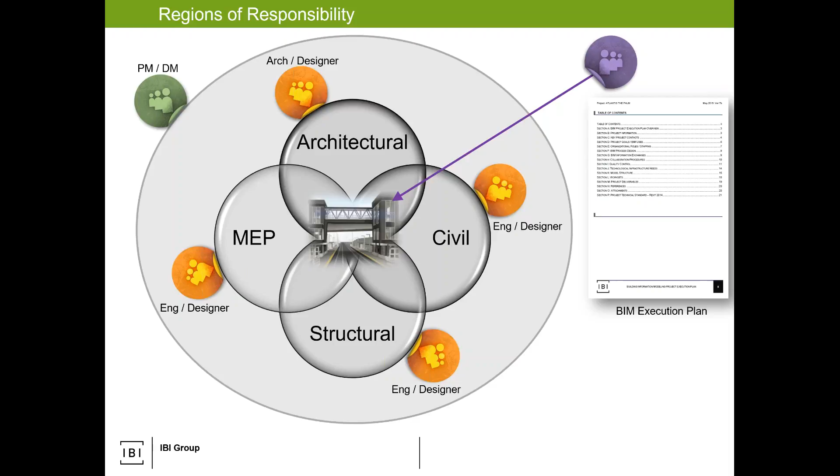But focusing on that central data, there is this role we're talking about today, the BIM lead with their execution plan. For me, the most important role—others on the project may disagree, doesn't matter. There's a vehement importance required here to document and define what we're doing and why we're doing it relative to that thing in the middle that we call the model, which has a direct influence on every other entity, person, or role associated with any one project. So strong, so powerful, so important. Let's just remember that.

The role, in a nutshell, will span these disciplines, so there's elements of BIM within all these disciplines. I like to describe the BIM lead as an orchestrator or a puppet master, whatever analogy works for you. You're orchestrating the development of modeled components, and then orchestrating the uses of all the information as they come together—scoping the requirements, planning, coordinating the team, championing the training, coaching, being that point of accountability. You're really like a discipline lead in itself. Usually you'll have a budget, you'll have some accountability, etc.

Now, in the BIM execution plan, we also talk about defining what we're doing and why, and also defining the breadth of who owns all of those specific components. And that's the trick there. We'll talk about that when we get to the execution plan itself.

But just imagine, look again, always look around the space you're in. I'm looking around my room, I see walls and chairs and ceiling and lights. Just from there alone, the walls will have joint ownership between architectural and structural. The ceiling, again, architectural and structural, but the finishes would all be architectural. The lights would be electrical. The furniture would be interiors. So just from those elements, I identified 5 different design disciplines, and they all converge together in this model.

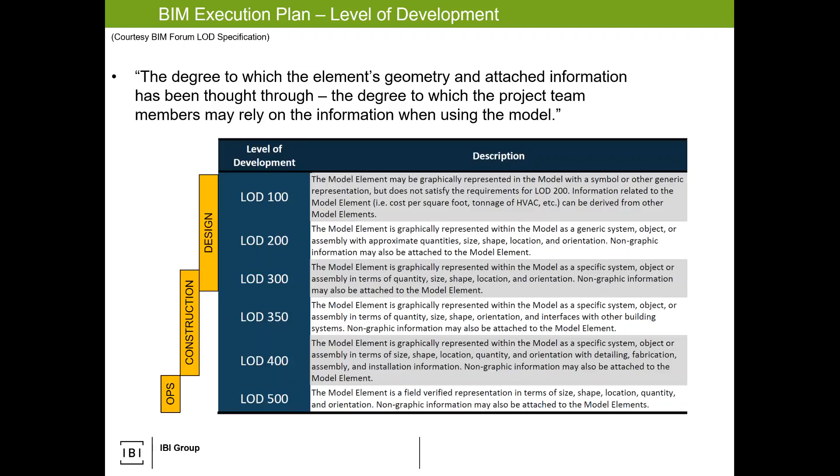So if a concrete wall is poured while I'm still designing the building and the concrete wall shifts half a meter because of a mistake, whatever it is, well, now the concrete's there. I must update my model to reflect that. So there's a little back and forth. That then gets into change mitigation.

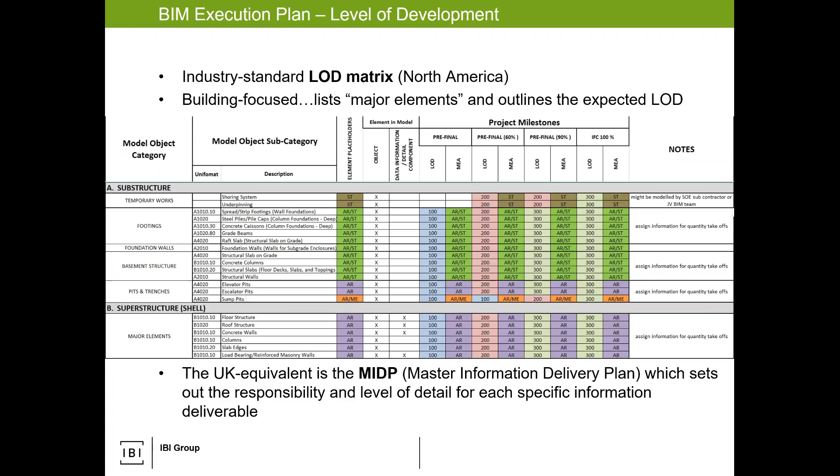Is it an expected change? Is it an error? Do I need to ask for more scope and schedule? Do I get more budget? All that stuff comes into play. But at the end of the day, the wall moved, my model's going to have to move. We're going to have to update and redesign and adjust accordingly.

On the civil end, the world is not just about buildings. We worked on this a couple of years ago. We said, okay, well, what do these LODs mean in the civil world? And we provided some examples. I'm not going to dwell on them, but simple things like a curb, right? Look at your sidewalk curbs. Oftentimes they're represented in a single line.

We said, well, let's jump into the world of 3D. We know the length, width, and height. The curb's going to give us volume, and you get the benefits of having volume of concrete along the linear road. There's benefits to that curb, sidewalk, etc. Then the biggest one for us is when we get into the buried pipe work, buried systems here. All of these pipe alignments, you get length of pipe joints where you might have valves, breaks, etc.

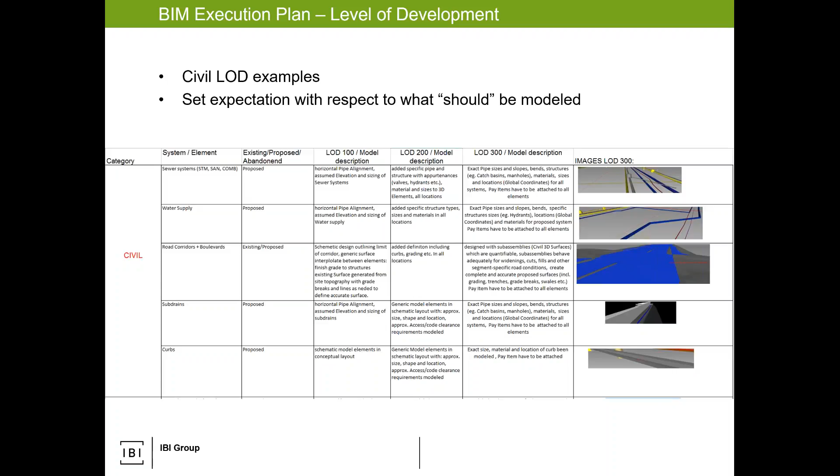And then the interferences, the geometrical exactness of where these items are in the vertical space buried underground to avoid clashes, enhance design. And if you could get the existing models to avoid clashes with existing, so powerful. So powerful. And later on, I can't remember which week, I'll show some examples of where we actually applied this, and it was a thing of beauty. If you think about BIM in the building world, BIM in the underground world is just phenomenal stuff.

Defining your BIM goals in the project. So just circling back to this here, this is a project I've worked on. So if you look at the BIM execution plan, you listen to me talk, you might think, oh my goodness, what are you talking about? This is insane. So here's your practical. Here are 3 simple goals. 2 high priority, 1 medium. The goal is what we're going to do. And then the potential BIM uses are how I'm going to use the model to achieve the goal.

That's it. Once I do that, I get the buy-in from the project manager, from the discipline leads. This is my BIM gospel. This is what I'm doing as a BIM lead to make this happen. Okay? It also protects us from a liability perspective. So this was on a major project, and 3D model with enough detail, roughly what would be on a 1 to 20 drawing to support the design engineering's required deliverables. That's what that BIM goal was.

That then tied into legal, saying we're not going to do a higher LOD. We're not going to go and BIM. A good example, if you think of wall details, I'm going to BIM my wall assembly. So I might have brick, I might have block, I might have insulation. So 100 brick and airspace, insulation and block. That's your typical architectural, we would assemble that. Might be 300 millimeters wide, maybe 350, and you do your outside wall. Very simple. You set that wall type up in Revit or ArchiCAD, and away you go.

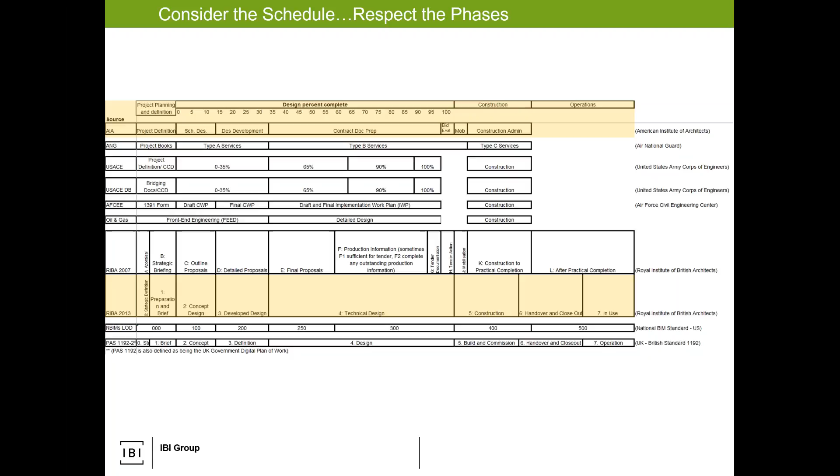So again, I think most of your backgrounds were not from there, but who knows where you'll end up after this course. They do a lot of BIMing in oil and gas, a lot of pipe networks. The architecture isn't as glamorous, but the data is phenomenal in that realm. So that's something to keep in mind.

Then we talked data turnover requirements. So, when we're making the plans, we get down to the information turnover. That's a huge question. And again, you'll be happy when it's just a PDF. But those days are numbered where PDFs ever do the trick anymore. I don't think I've been on a project with just PDFs as a turnover. Oftentimes it's PDFs and CAD, right? And that is the most common. So CAD being DWG or DGN. And I've had some strange projects where it's actually both, and that makes me scratch my head, but whatever, you deliver what you have to.

So that means in the BIM world, if you're in tools like Revit or ArchiCAD or SmartPlant 3D, where it's actually CAD neutral, you need to have that workflow to say, okay, we're modeling, I'm going to need to export all my sheets from my BIM tool to one of these CAD tools. And then you get into complexities where, Revit to AutoCAD, even though they're all Autodesk, it's not always as easy as it should be. OpenBuildings to MicroStation, a lot easier. It's Bentley to Bentley. SmartPlant 3D to MicroStation, not bad. SmartPlant 3D to AutoCAD, horrible. So depending on what you're doing, you could have some challenges.

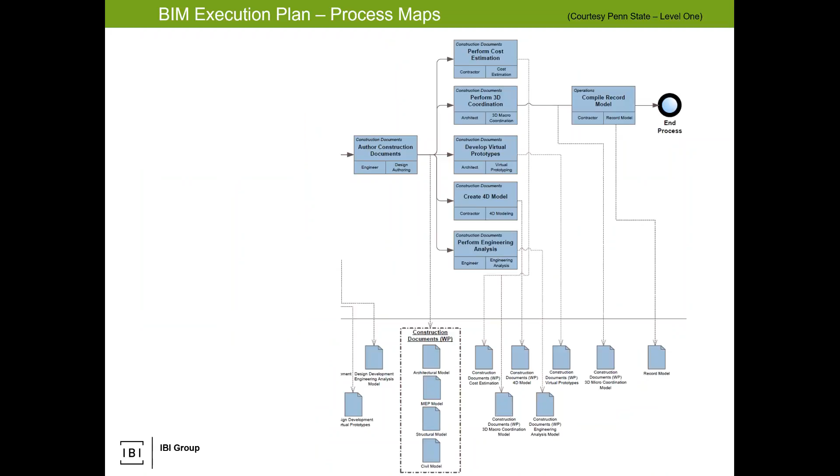Then we're going to deliver. Next phase, continue creating, validate, deliver, create, validate, deliver. Yay, we're done. We design authored. That's what a process map is. At IBI, we've catered them and we've adjusted them to suit. But just understand that these exist and definitely have a look at them because they all come into play.

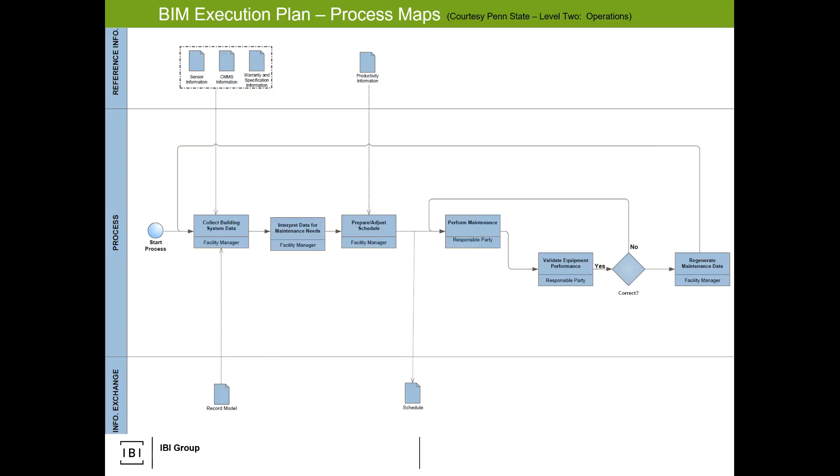Operations is a huge BIM use, yet it doesn't happen all the time. This is where your owner is on board and understands that there's more to BIM than just building my model. This building lives forever. This building will be dynamic. The data will live and move forward, and I want it to be all accounted for. That's a beautiful BIM world. Gets accounted for. So those were the process maps from Penn State.

These are a couple that I've made in my career where the project didn't have that much of a delineation or had some different particulars. So I just wanted to show you that, even with these process maps, I tell BIM coordinators, there's no right and wrong as long as you're conveying what's happening.

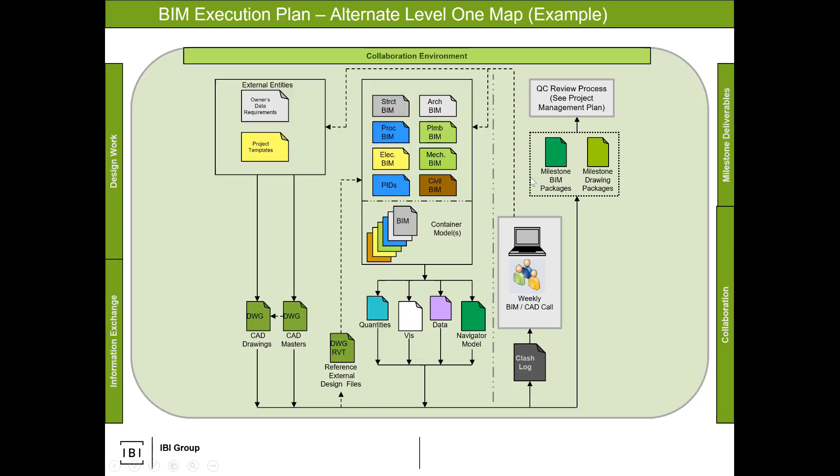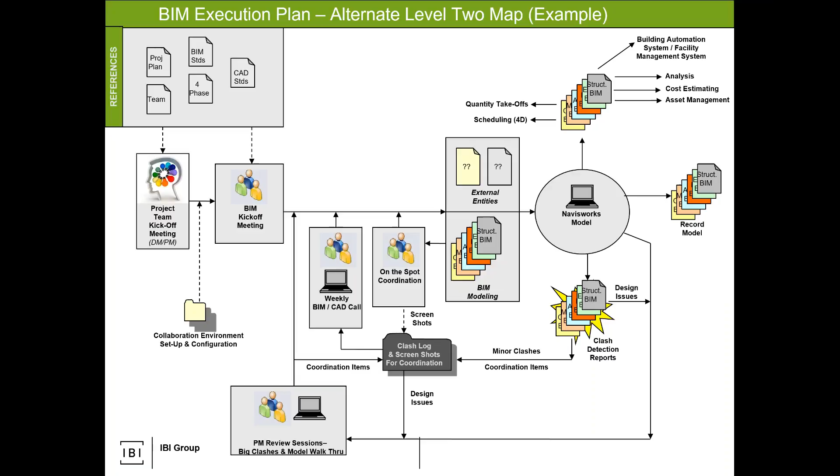There's a lot of people out there that will take something output from your BIM, comment on it, and there has to be a resolution. And that's why I'm excited you guys are exposed to tools like BIMTrack, because that's what it's about, tracking those comments. If you've been on a project where you've had a tool like Aconex or Autodesk's BIM 360, I can name a bunch. A lot of those are focusing on mitigating the conversation, tracking the decisions, tracking the solutions, and building a feedback loop back to us BIM coordinators to further enhance that single source of truth.

Fun stuff. Back to here. Start with this, end with this. This is by far the most critical thing to understand. Owner's requirements, assessing the team, building an initial plan, continually updating the plan as we go forward.

If there is any takeaway from this week and this week's assignment, it's whatever you put down is about achieving this, because without this, the risk on the project, the quality, the ability to deliver, the ability to meet the deliverable requirements are all gone. This is everything. And that's my message for this week.

Now, just being mindful of time, very quickly on this, talking about this here, we're often faced with, oh, the burden of the BIM lead, the burden of the role that's brand new, blah, blah, blah. And I get in there and I just say, no, it's not. We've been doing this stuff for decades.

Now, I think in week one, I said BIM was coined about 10, 12 years ago. But the concept of managing some type of information, whether it was in a 2D CAD database, that's what AutoCAD was, or other forms where there was 3D modeling, but not called BIM, whatever. There was always some person people went to for accountability. That's what this role's about.